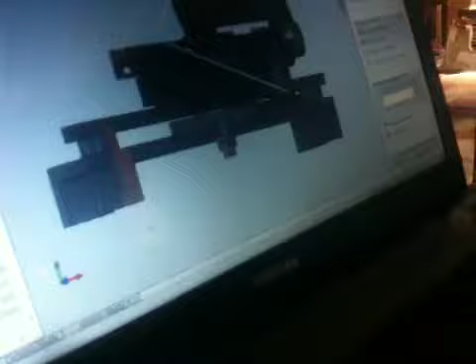We're here with Yunso reviewing the design of the cold saw. Yep. And the initial design we start with, so here's how it's looking towards the end of the day. Show the whole thing. Yep, so a cold saw like this. We've got an assembly of a base plate. The base assembly, and we've got then above that, what do you call that? A swivel plate. Yeah. Above that is a mounting plate for the vise.

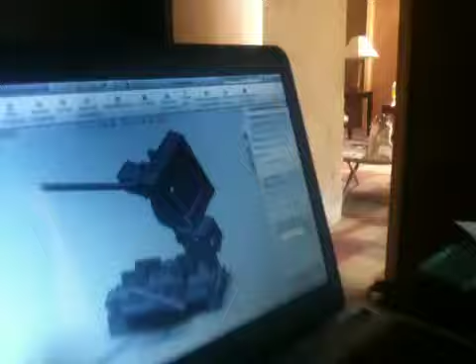That's correct. So we can actually go over this step by step. Yep. But let's show the previous version. So in the previous version, we wanted the swivel mechanism to have a base plate here. This is a front view. That would be the front of the base plate. And then this was to be mounted into the base plate, such that this and the base plate would be one.

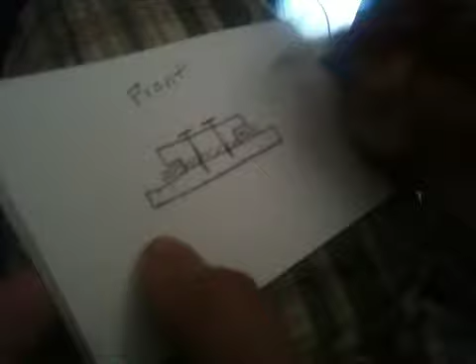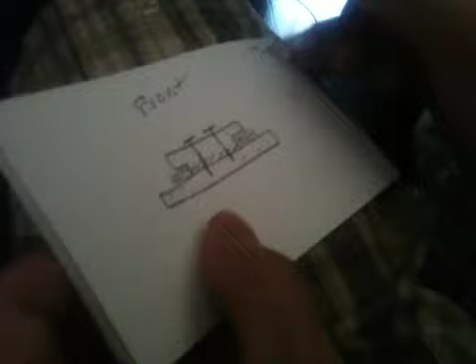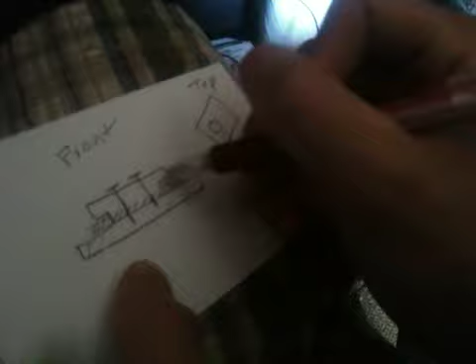This is a flanged, very thin round bar. And then you would have a large hole. Now this is a top view of the swivel plate. You would drill a large hole like this, and then fit the swivel plate onto the base plate, then put the flange disc on top of it, then screw it down, such that this plate would be able to swivel around the flange disc.

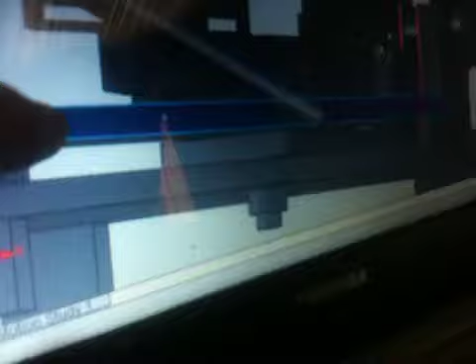So here we have the flange disc analogy, and in the new version this mounting plate replaces the flange, and the bolt replaces the other part. Yes, but we have a threaded rod. Okay, so this is a simplified assembly. So let's just go through this design here. Within the assemblies or within the full assembly? Within the assemblies. Okay, within the assemblies.

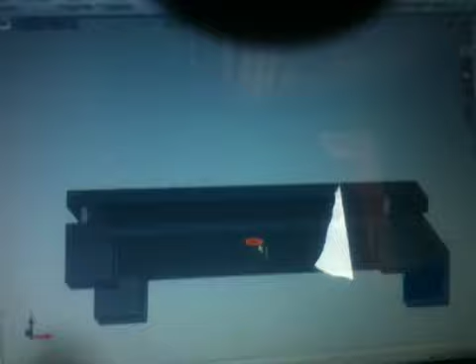Alright, so starting from the base assembly, where the cold saw contacts the mounting surface, you have these 4 blocks as spacers welded onto the base plate, and then you have on the base plate the hole which allows you to put the swivel threaded rod into, such that the rod is fixed relative to the base plate, and you swivel the base plate around that fulcrum.

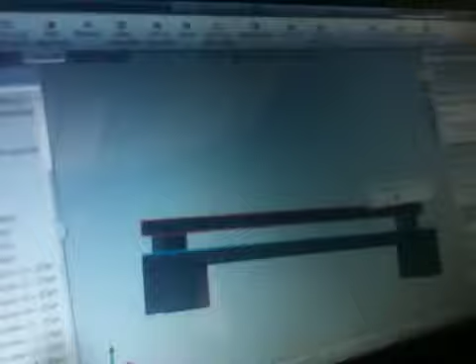And then you have this very thick flat bar up here, spaced from the base plate, such that we have space for the swivel plate between here and here. And then this flat bar just acts as an elevated platform on which to mount the vise. And you see those 4 holes here, 1, 2, 3, 4, and those are used to mount the vise accurately.

Can you turn the light up on the screen a little bit? Light up on the screen. Oh, I think this is maximum. It's max. Yes. Okay. Yeah, this is maximum.

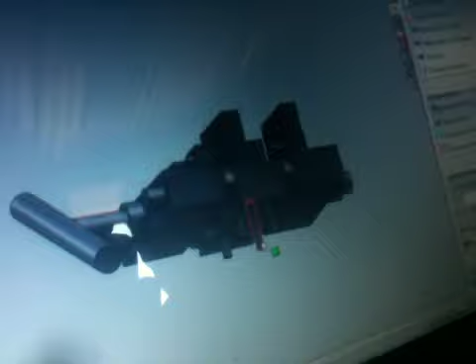Okay, so that's the base plate and mount plate for the vise. Then moving on, we can see the vise assembly. So onto those 4 holes from before, you have these 4 fasteners going through the body with recessed holes. Yes. And then you have the counterbores up here, so that the heads of these fasteners don't meddle with the working surface, mounting surface.

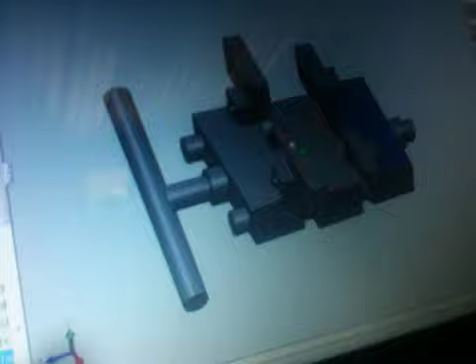And then you have the moving blocks, one with the left-handed nut and one with the right-handed nut, such that when you rotate this handle, the 2 blocks either move close together into the fixed block or both move away from the fixed block, such that we have the auto-centering vise feature.

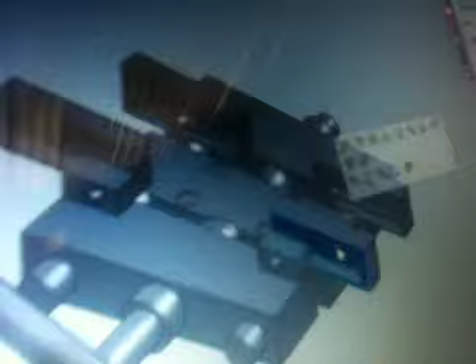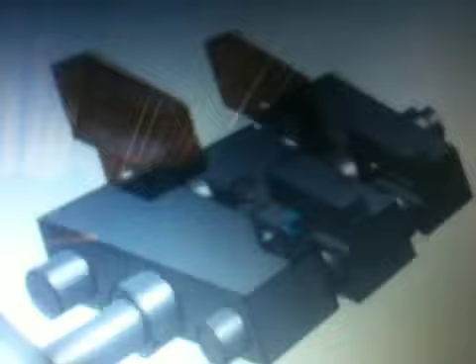And another major feature is we have these adjustable, removable vise jaws that allow you to accommodate a variety of workpiece dimensions, because we don't have a lot of movement, but we don't have to if we have adjustable vise jaws. And these have 2 slots, one to fit the diameter of the screw, one to fit the diameter of the head of the fastener, and the fastener goes in through here to these blocks that are welded to the moving blocks. And that's pretty much it.

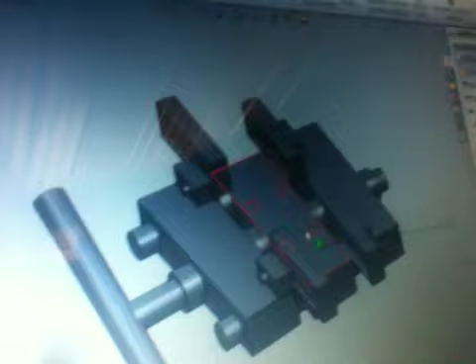Like, if you want to cut thinner pieces of metal, you just unscrew these fasteners slightly and move these adjustable vise jaws inwards, closer to the center, such that the thin material you're working with is supported more during the cut operation. And other than that, shaft collars to hold the threaded rods and supporting shafts in place, and thrust washers for the threaded rod, such that we minimize the friction when clamping.

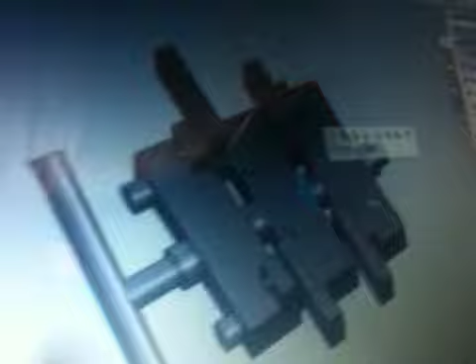Okay. And that's it for the vise. And you can take off the vise jaws if you've got thicker pieces, actually. Yes. And what's the maximum thickness that can fit?

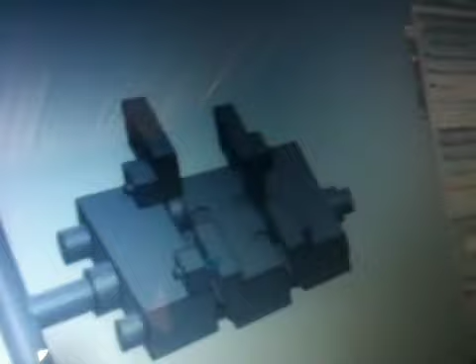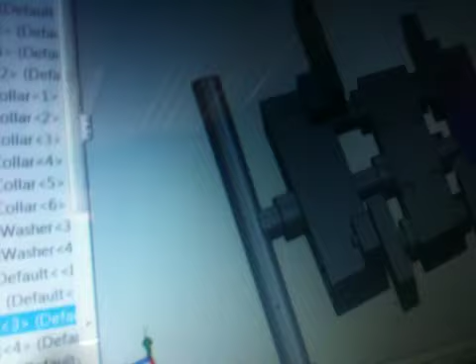Maximum thickness it can fit is likely 4.5 inches. And without the jaws, that's 4.5, or with the jaws in place? Without the jaws in place, I'd say maximum is 4.5. And with the jaws, actually, I haven't really tested it. We can test it now, in fact. We need to have 4 with the jaws, probably.

If we can measure this, for like 4x4 tubing. Do the measurement now. Oh, let me just clear the selections because it's selected multiple faces. So it's 117. This is over 4 inches. Okay, good. So this is like 4.5 inches, even with the jaws already. Okay, so that's good.

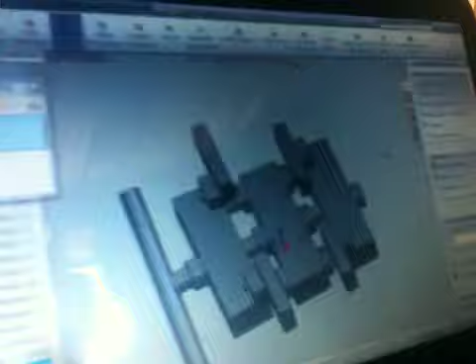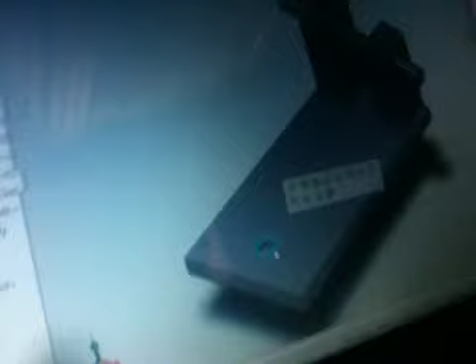And moving on from the vise assembly to the swivel. As discussed before, we had the swivel plate with the hole near the one edge, centered along the width. And in that hole, we're going to weld a threaded rod from above here, such that we can fit this threaded rod into that hole from the base plate before.

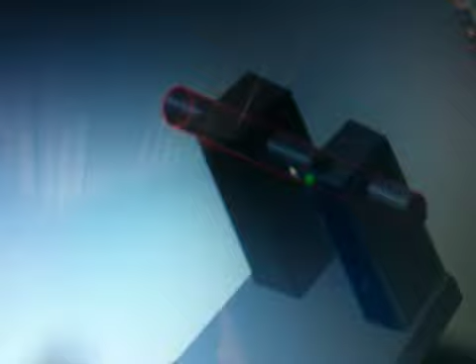Other than that, we have on the swivel plate 2 shaft blocks which bear the load of this round bar, which is going to be supporting the drive assembly and the support for that, which will be heavy. So that's why we need pretty large diameter round bar. And 1.5 inch we're using. 1 and a quarter inch.

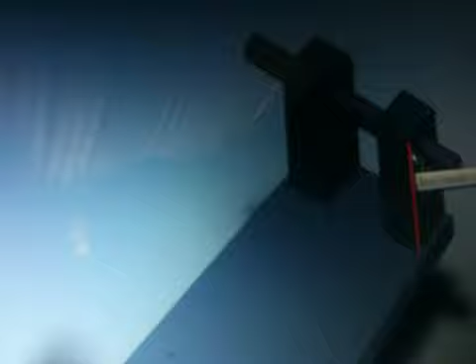1 1/4. Yes. But we're keeping the support very close to the shaft blocks, such that we get minimal deflection of the round bar. So that's one of the design rationales that are very important. We want to keep the support close to the shaft blocks.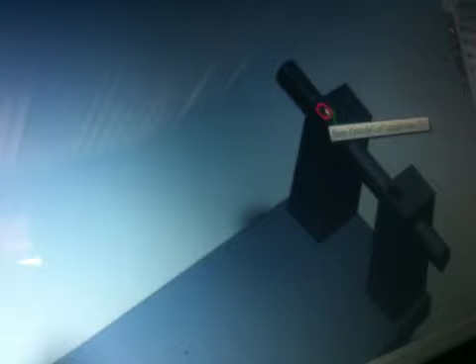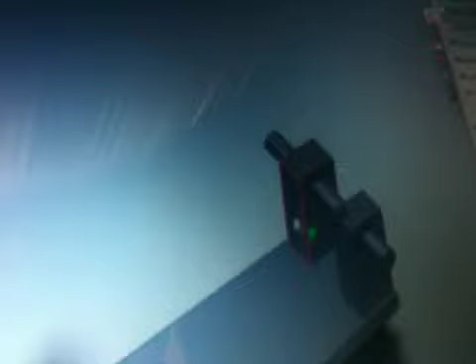And the extra feature of this shaft block is you have a hole counterbored and threaded such that you can put a screw into it, and I'll explain the functionality of this right now. It's called an adjustment screw that acts as a stopper for the movement of the drive assembly.

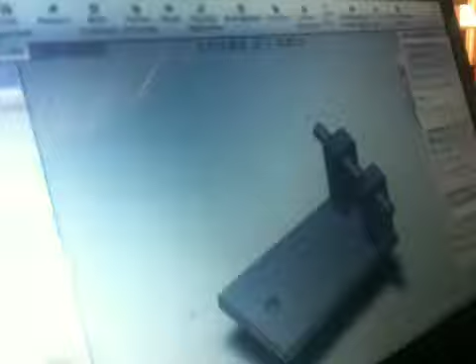When you hold the operation handle and then move the blade down, you want the blade to not cut the vise also, right? You don't want the blade to keep on going down and cut into everything, including the base plate. So if you want the blade to stop at a certain point, bottoming out at a certain point, you need to stop the drive assembly with some kind of stopper. Mechanical stoppers are very effective because it's pretty much failure proof as long as you have the appropriate supports underneath.

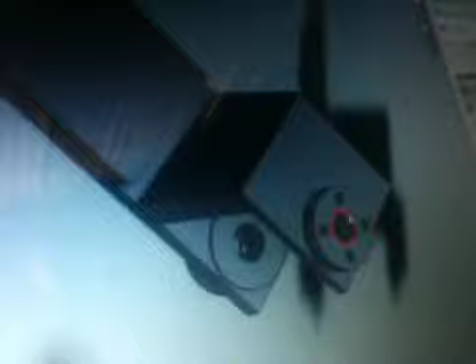Excellent. So now we can go to the support assembly, and this is what fits onto that round bar we saw before that was supported by the shaft blocks. As you can see, we have thrust washers and shaft collars. Now, there's a special thing about these shaft collars because at the side you have these extra holes that allow you to put actual forces and essentially achieve tension,

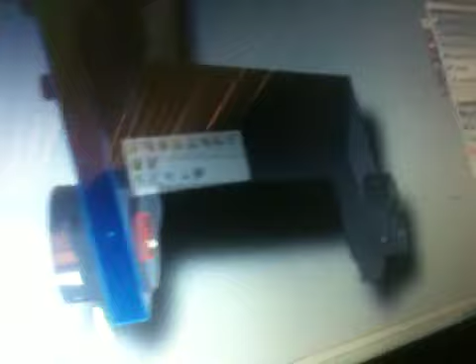lining, say, this plate directly up with the shaft block through this thrust washer, such that that is very much in tension with the shaft block that's right next to it here. And so we achieve greater precision that way because we don't have any wobbliness.

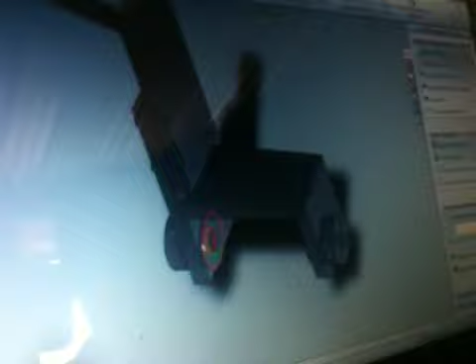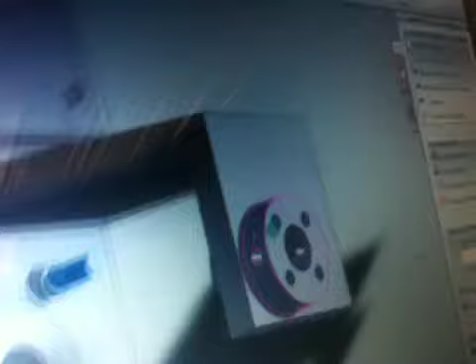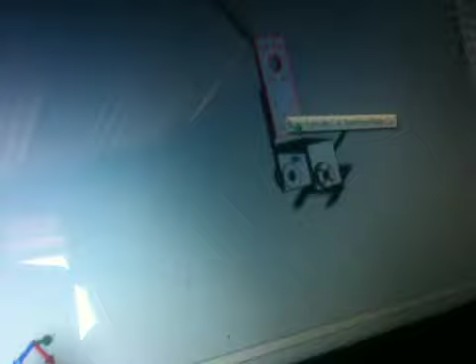And other than that, you can see how this support assembly interacts with that stopper from before. As you rotate this along the axis of the supporting bar, this screw will move into that stopper and contact the head of that stopper, and hence this entire assembly will have to stop. And this can be more effectively shown in the full assembly.

What's the thickness of that? That's 1/2 inch, or it's right now 1/2 inch to maintain uniformity, but it can easily be changed, so it's not too much of a concern where things are easily editable. Excellent.

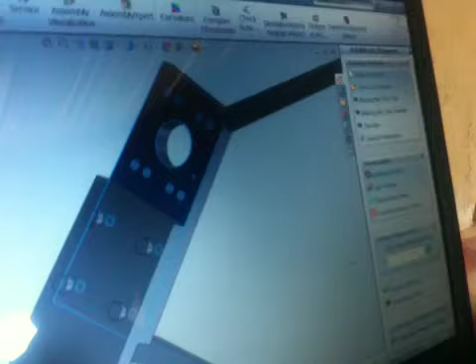Okay, and other than that, we have the feature of the modular drive assembly, where this support can be unfastened using these 4 screws, and this piece, which is supposed to mount the hydraulic motor and the blade guard, can just come right off, such that you can assemble this fully and then put it onto the support, making it easier to manufacture.

Other than that, we have the operation handle, which can be attached on by welding. Very strong joint we need here, because it's going to handle a lot, and it's going to be transmitted over a long length. We have a lot of mechanical advantage to work around here.

Beyond the support assembly, we have the drive assembly. Now, this was the hydraulic motor that's supposed to mount onto 4 holes of that drive plate that we saw before, and linked to it is a shaft coupling held